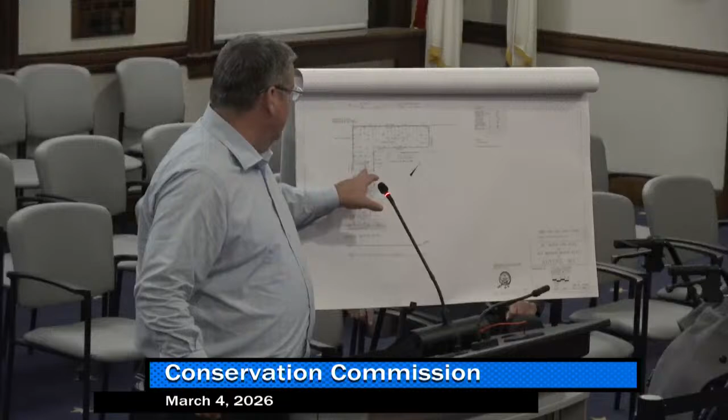Sure, thank you again, Mr. Chairman, members of the commission. For the record, Rick Salvo, Engineering Alliance, here on behalf of Anthony and Nico DeCesare, the owners and developers. You might recall this building had been there for a long time. It was an 8-unit building. They added stories above and had to put a small addition in the back to accommodate an elevator.

We created a pervious parking lot with pervious asphalt to accommodate the parking for it, which was done in the floodplain. So the parking lot expansion, which met the DEP stormwater regs by virtue of the pervious pavement, and the addition required the filing of a notice of intent. That work has now been completed, so we're looking to get a certificate of compliance to close this project out.

Absolutely. So walking down the property, everything was stabilized. It looked really great - all of the plantings in the back and on the side of the building, the pervious pavement. I wish you the best of luck with that; it's not easy to plow and work with in the wintertime or treat, but I thank you for putting it in, and I know the extra cost to your project is appreciated. Walking down the property, it was in immaculate condition, even the elevator shaft that got put in - no oil, still had an oil separator on the property. Thank you for going above and beyond on that.

I don't have any other questions. It was pretty straightforward, but any of the other commissioners? Thank you, Mr. Chairman. I was able to walk the site yesterday. Oh good, I couldn't make it on Saturday.

I was curious about something I saw, maybe you can give me an answer. On the south side of the building, pretty close to the front, attached to the outside wall, it almost looked like a gas meter type arrangement - it was gray and everything. Was it the north or south side you're talking about? As you're facing the building, it was on my left. Yeah, the southbound side - there is a gas meter.

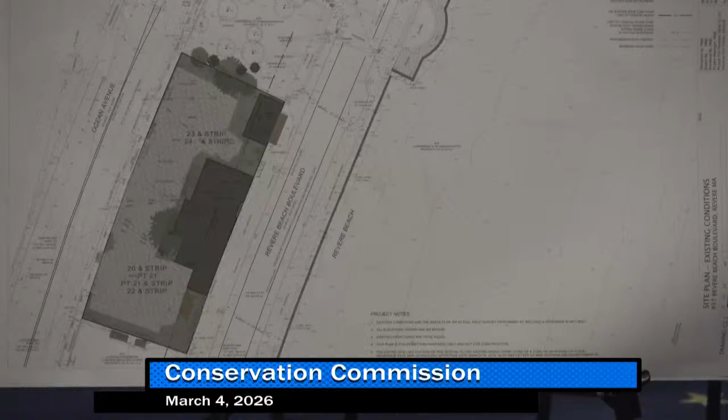So it's not in the FEMA flood zone. There's no BVW within 100 feet of it, but we do have the coastal flood zone, which runs along the front of the wall at the beach area here. And so what that does, it puts a 100-foot buffer zone onto our property, and that's why we need to file with you tonight. Okay.

So moving forward, this is the proposed development. Have you looked at this yet? I don't know if it was the first time. Yep. Okay, so as you see, it's a 6-story redevelopment of the property.

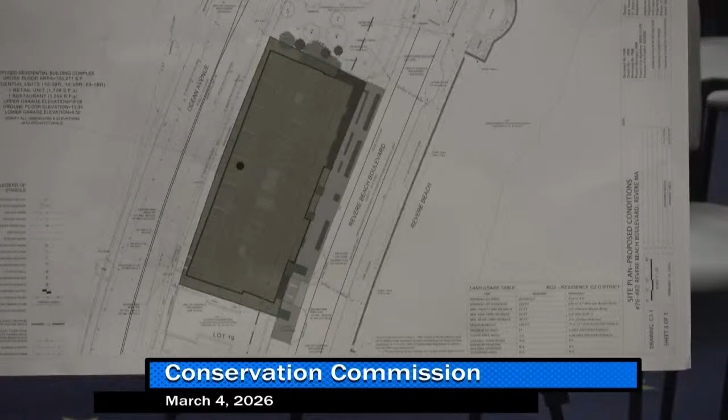There'll be 2 levels of garage parking. One at the lower level you access off Ocean Ave. Another side on Revere Beach Boulevard you could access on this side here. There's about 80 units or so and about 82 parking spaces on the property.

And again, you can see the coastal flood zone 100-foot buffer zone runs in that manner there. So it's in the front of the property, and that's why we're here tonight.

Along with the proposed building, there's additional landscaping involved, the replacement of the sidewalk in front of the building along Revere Beach Boulevard, and also in the rear, Ocean Ave, that sidewalk will be replaced as well. Working with DCR, they asked us to do not just a concrete sidewalk, but some landscaping amenities as well. These green areas represent planters, more greenery in front of the building on Revere Beach Boulevard there.

The site now from the top is about 16 to 8 in elevation. It slopes from here, north to south. It'll be pretty much leveled up, but the 2 parking levels you can access at different levels. And the restaurant, retail, whatever it might be, will be off the Revere Beach Boulevard side.

As far as drainage, we worked with engineering, talked to DCR, and it's collected from the roof, downspouts, then tied into 2 catch basins on Revere Beach Boulevard here and there. Any other runoff here would head towards Ocean Ave, a very small portion of that runoff, and a little bit here on Revere Beach. Utilities will be sewer, water underground utilities, and electrical underground as well.

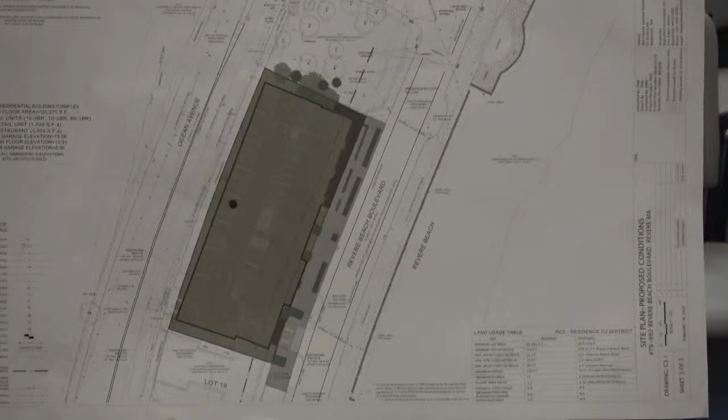Those will move during construction. If there's any gravel removal, they'll keep it on site and eventually take it off. When they're done, they'll go back at the soils and add greenery as the final stage of the project. So that's it—I'll be happy to answer some questions.

Have you already secured your permits for the discharge on the DCR side, on the Revere Beach Boulevard side? Peter Blaisdell was the project engineer—he told me he met with or spoke with DCR, and I don't know if he has a permit in hand yet, but I know he's dealt with them and they wanted this design. I don't have the DEP file number, so we'll be back here at some point. I can confirm that.

I'd definitely want confirmation of that. I don't know if this is a case of what came first, the chicken or the egg—you're kind of waiting for the Concom to say yes, so the DCR will say yes. I just want to know where we are in the pecking order with that approval. If they're on board, I'm fine with that, because I'd love to not see water—even though it's roof runoff considered clean by industry standard—going to Ocean Ave. I'd love to see it inundate their system, not ours. No offense, DCR.

The other question I have is, because of the elevations of the property, it drops off pretty drastically down to Ocean Ave, and where you're located on the southbound side adjacent to that property, putting silt fences and catch basins over there is going to be a little tricky. So during deconstruction, trying to get the site level, I'd recommend something more modular, like hay bales, especially on the southbound side.

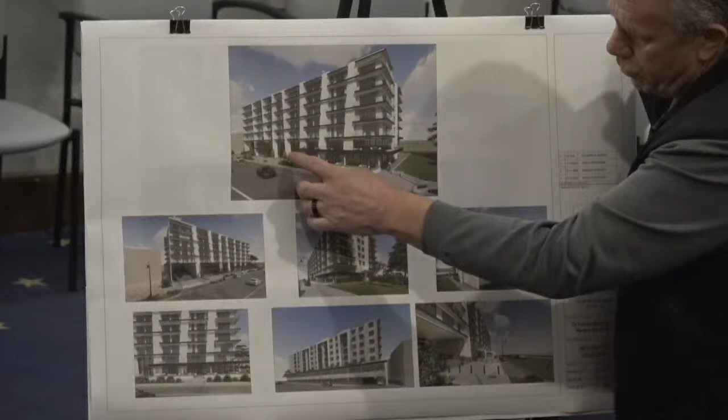So here's the sidewalk with the landscaping on it, and the entrance is in the center. So there's a retail spot over here, the Twist and Shake has, like I said, first right of refusal on it. And this side is a restaurant, it goes up to the second floor, the mezzanine level. The rest are condos, so it'll be steel construction up to this level, and then it'll be wood frame construction, typical of what's happening down there.

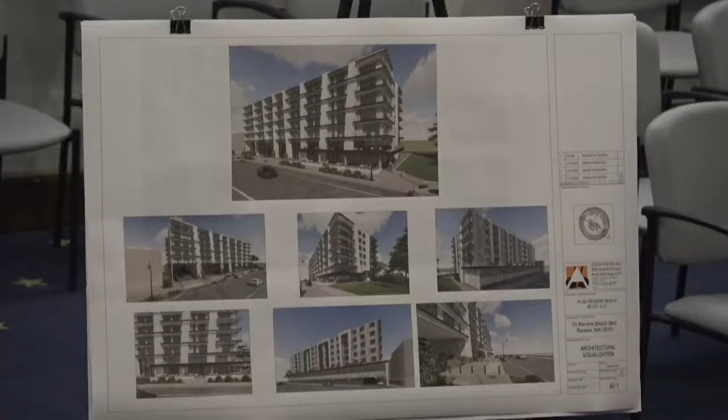Thank you for showing us this. As I'm going to be looking at this building for the next, hopefully, 80 years of my life, I just want to make sure it's not an eyesore like the brutalist buildings that were there, so I just had to ask. I know we discussed it on site, and I can't remember — for some reason the number 16 is floating around in my head — but the first floor elevation for the site, I can't remember.

First floor elevation — was it 12? So the lower garage is 8.5, the ground floor is 13.3, and the upper garage is 19.6. So 13.3 would be the median, I guess, the ground floor for the retail and probably the garage entrance area, and then where residency starts.

So elevation 19 roughly is where the residents are going to be? Higher than that — residents won't start till higher than that, I think. So the ground floor would be 13.3, so be above that, you're like more than 20s I'm thinking. Yeah, where the residents start is where my concern would be. So they've got a good 20 feet before water really starts getting into that building.

Well above 15 is the number, right? What is the floodplain, 13 or something like that? The floodplain is 14, the wall is 15.5, so it stops at the wall. Yeah, this is so, probably approximately 28, right. Now with 13 here, so that makes sense, all right.

I don't have any other questions. Any more from the board? Yeah, just a comment during demolition and construction, just with the contractors, make sure the debris stays inside, like dumpsters. Sometimes I see the wind taking all this plastic going all over to the ocean. So I don't know if something can be done, like signs or anything, to be more aggressive making sure no trash is going out, especially when it gets windy. You can see large plastic, I pick it up with my son sometimes, and you tell them the message but it doesn't trickle down to them.